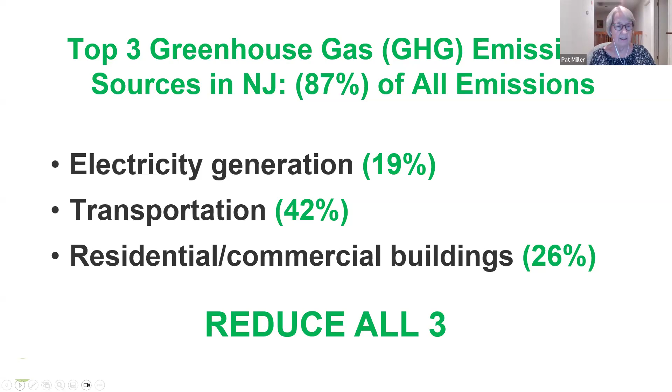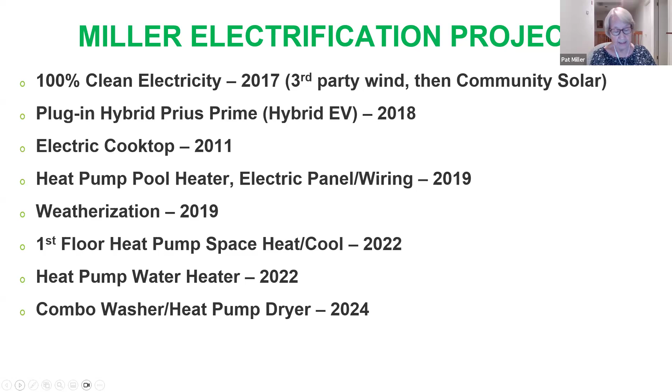We'll talk about the first 2, clean electricity and transportation, first. Then the other household electrification projects in the order they happened: first, early on, electric cooking, then a pool heater, then wiring and weatherization in 2019, heat pump and heat pump water heater in 2022, and finally the heat pump dryer in 2024. So I'll go through each one of these.

First, clean electricity. Rooftop solar is the best and most cost-effective choice for most people, but it's not practical for us in our totally forested yard. This is a Google Earth picture of our house. For years, we got our 100% clean electricity through a third-party supplier for wind power from Texas.

Now we have a better local choice in the new New Jersey Community Solar Program. Here, a developer builds a large commercial solar field and sells shares of the electricity to subscribers. Currently, there's a 20% discount below the utility cost, or more for low-income households. Our solar project is on a warehouse roof 5 miles from our home.

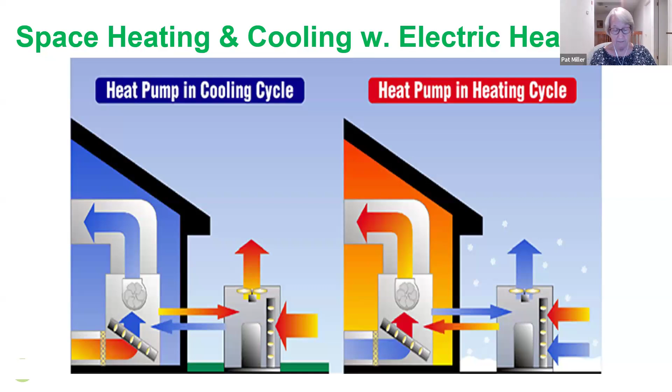We didn't really get serious about switching off gas until we were trained as climate reality leaders in 2017. Then we learned about heat pumps and how much more efficient and non-emitting electric appliances are than fossil-fueled ones. And of course, the heat pumps can be reversed and almost always are, to both heat and cool.

Ironically, though, the first heat pump we installed wasn't for our home airspace. It was an air-to-water pool heat pump. We'd had a gas pool heater for decades, and being outside in the weather, it had failed and been repaired several times. This time, when Steve said he would repair it, I told him it must be very inefficient.

It's so old, let's replace it with an electric one. This was 2019. He went shopping in local pool supply stores and found that it wasn't something that was stocked locally. So he shopped wholesalers on the internet. The one he found, a Hayward, was in Florida.

Of course, everyone in Florida has heat pumps, and many have pools. If the air temperature there is year-round 80 degrees, which it pretty much is, it takes practically no electricity. Steve said practically, because it does take electricity, but practically very little to heat or cool to a comfortable temperature with a heat pump from 80 degrees. They shipped the heater directly to us, and Steve installed it.

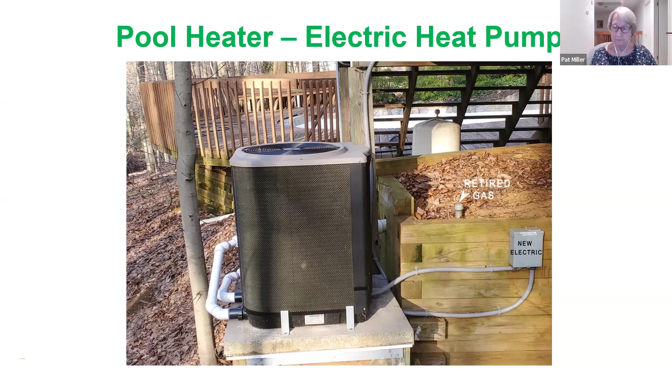Of course, the air in New Jersey is a lot cooler than Florida, but we only use the pool for about 2.5 months in the summer. And this thing is so much more efficient than burning gas. Plus, extracting heat from New Jersey's 70-degree air to heat water to maybe 85 degrees is so much easier a lift than, say, heating the air inside a home to room temperature from cold winter temperatures outside.

The difference between the outside temperature and the output, or inside temperature, is a big determinant of how efficient it's going to be and how much it's going to cost, how much electricity it's going to use. The pool heat pump is very economical.

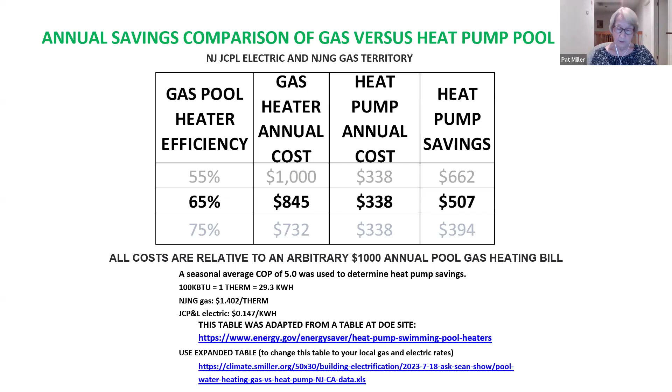Since the pool heater is about 10 feet from the house, this was the occasion for us to have the electrical work done to plan for future electric appliances. The IRA would cover some of this electrical work now, but of course we didn't have the IRA in 2019. So we paid about $3,000 for the pool heater and hired an electrician for another $3,000 to expand our circuit box and run wiring to the pool heater.

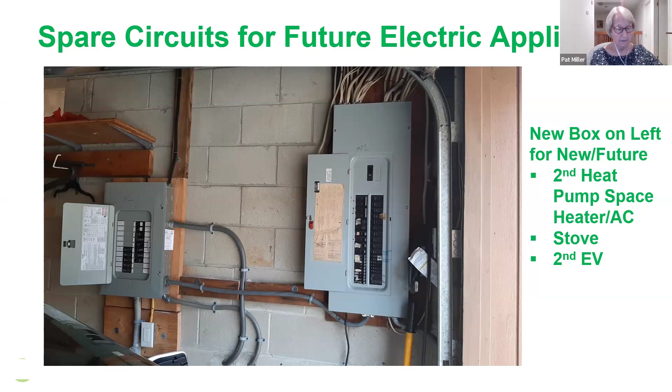Around the same time, Sustainable Jersey and the utilities started advertising and running promotions for home energy audits and energy efficiency measures like insulation, sealing air leaks, switching to LED lighting, and smart thermostats. We were planning on getting a heat pump space heater whenever we needed a replacement, but not until then. It made sense to weatherize first and have that done. Then a new electric heat pump system could be properly sized to our more efficient home when we needed it. Plus, we could start right away to save money by using less energy.

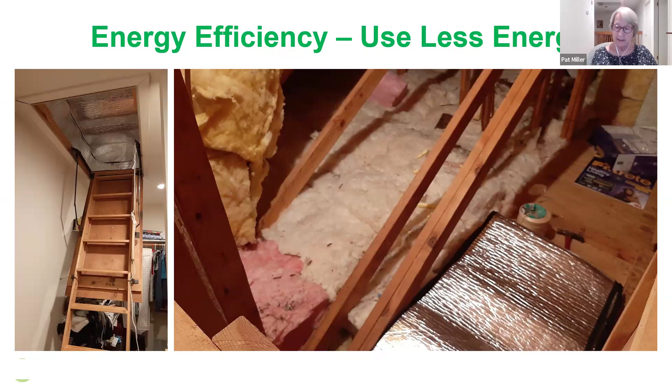Steve, ever the do-it-yourselfer, took the free audit and the Nest thermostat, of course, and did the upgrades himself. Here is an insulated zippered cover for the attic stairs on the left and extra insulation in the attic on the right. And these are his supplies for air sealing ducts around windows and doors and anywhere else there are air gaps to the outside.

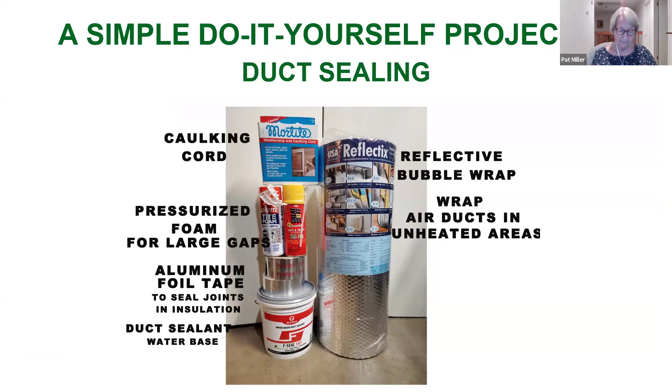We had a plan to start immediately to switch household appliances to electric whenever they needed to be replaced. And we knew it would take several years, which is fine. If you stage it over the next 8 years while the IRA is in effect, the tax credit caps reset every year.

Plus, this January 1st, 2025, the utilities Triennium 2 will go into effect, and we expect there to be much more generous rebates from the state and the utilities and discounts for decarbonization. We don't know what these are yet because they haven't all been approved, but we should be hearing the actual amounts by mid-October. And they go into effect on January 1st, as I said.

The most important and carbon-intensive appliance to replace is the gas or oil furnace.

When our air conditioner needs to be replaced, we plan to switch to an electric heat pump for both heating and cooling. In mid-2021, one of our 2 air conditioners stopped working, and we decided this was the opportunity to install a heat pump to replace it.

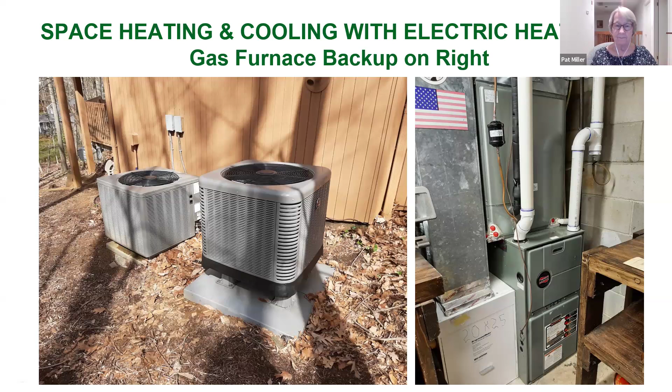The next year in 2022, toward the end of the year, our water heater sprang a leak and we replaced it with a Rheem electric heat pump water heater. It was purchased and delivered from Home Depot, and Steve installed that, both the wiring and the plumbing. This one uses...

240 volt service, but you can buy heat pump water heaters that plug into 120 volt outlets. This one cost about $2,000 for a 65-gallon tank. We have plenty of hot water stored, even if the electricity goes out.

We applied for and got a rebate of $750 from the state, and this was still before the IRA went into effect. Our gas bill during the spring and summer months is now less than $15 per month, which is just barely above the fixed access charge for the gas, which is $11.

The last 3 months, as a matter of fact, our gas bills have been $11 for each of the 3 months, which means we haven't used any gas at all.

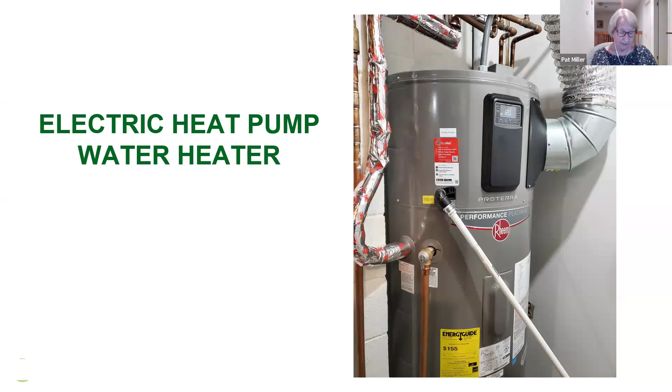Finally, this spring, 2024, our washer went on the blink and sprang a leak. I had decided that when either the washer or dryer failed, we would replace both with an all-electric set, and the dryer would be a heat pump. Shopping online, I was attracted to the combo washer heat pump dryer because it used a single 120 volt outlet and would not need any wiring work.

Both the washer and condensing dryer drain into the same drain as the old washer, and venting to the outside is not needed at all. We just closed up the hole in the wall. It reheats, the heat pump dryer reheats the air inside it continually while drying and condenses the humidity out of the air and down the drain.

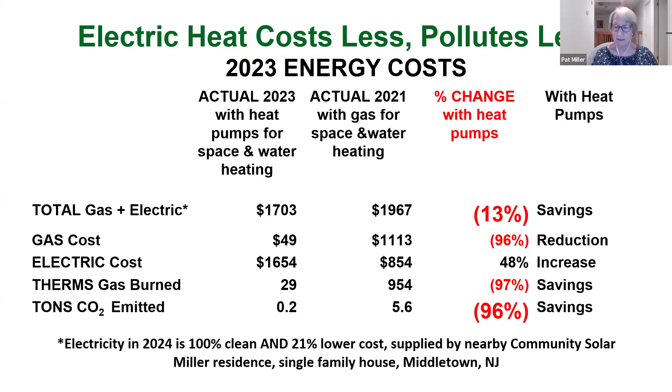I just wanted to point out how well our single non-cold-climate heat pump performs. On January 17th of this year, during a cold wave, the outside temperature dropped to 15 degrees overnight. The inside temperature was set to 68 degrees but had fallen to 65 when we woke up. We subsequently turned off the heat pump and turned on the gas furnace to warm up the house for a few hours until the outdoor temperature rose above 20 degrees.

January was the only month in the last year that our gas bill exceeded $15, which is just above the $11 access charge. The gas that month in January was $50 total, so that's the largest bill we had on gas.

Now, moving on to our daughter's house. Some of you have heard us talk about this house also. We've been upgrading and electrifying it, so I'll bring you up to date on that project.

A couple of years ago, they had a 2-room addition built onto their house that they specified with the contractor should be energy efficient. The contractor asked them if they would prefer a heat pump or a gas furnace. They had no idea, so when I overheard this conversation, I said, heat pump, of course.

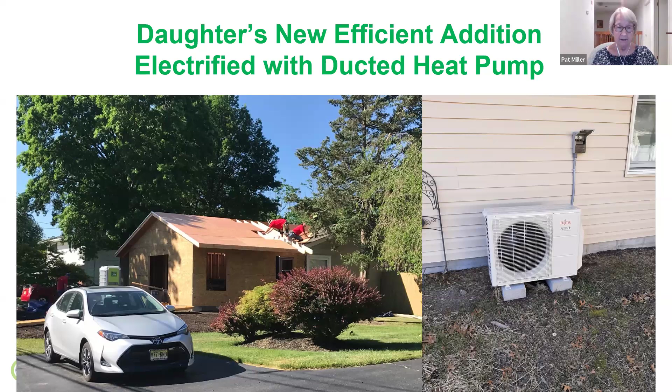They, and we, were now disappointed that the rest of the house was so drafty. They needed portable electric heaters in places for comfort, so we embarked on a big weatherization project.

This is the project we finally agreed to with the contractor Ciel Power, CIEL. The cornerstone of the project was the Home Performance with Energy Star program that the state runs with the U.S. Department of Energy, which provided a discount of $5,000 if a 25% energy reduction could be attained. In the end, it was much better than 25%. So the whole project, including insulation, air sealing, and an electric heat pump water heater, cost just over $9,000, which we thought was reasonable. And then, because now finally the IRA is in effect, it was eligible for a $1,200 IRA tax credit in 2023.

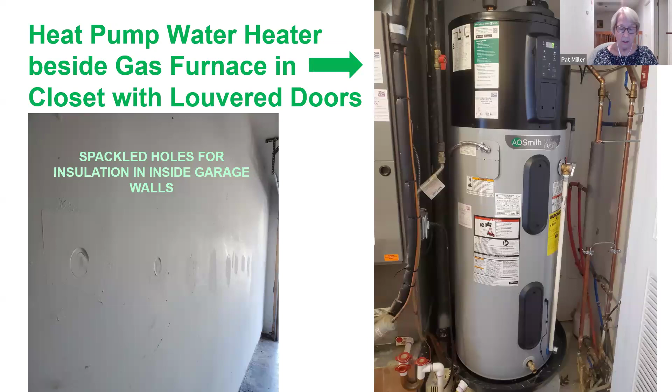Here's a picture of the wall insulation that they added. This is inside the garage. Mainly, the wall insulation was blown in from outside by popping a row of siding off. Inside the garage, they drilled holes in the drywall, blew it in, then spackled afterwards. I think they finished it up a little better than this picture I took shows.

On the right is the A.O. Smith water heater, which failed twice before they got a working model on the third try. It was either infant mortality or damage in shipping, but it caused us a headache. It's in a closet in the front hall next to the gas furnace, which you can barely see on the left of it. That gas furnace still heats the main branch of the house, and you see on the right the louvered doors.

The house sits on a slab, so there is no basement, and the louvered doors provide for the air circulation that the heat pump water heater needs. So, like a refrigerator, it's heating the water on the inside, and the outside air is cool, which is great in the summer but not so great in the winter.

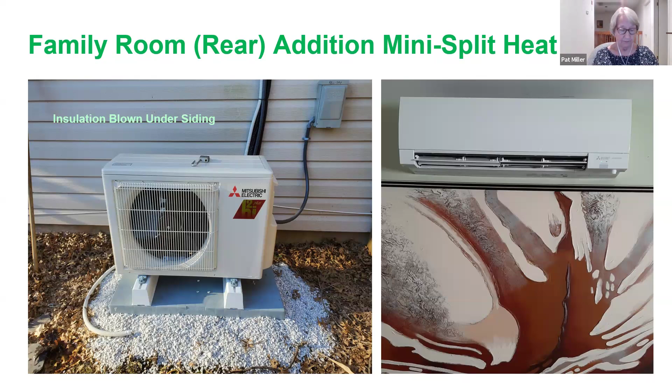Finally, in the last week of the year, our daughter was involved in a car accident that didn't injure anyone, thank goodness, but it totaled her car because the airbags deployed. They were able to buy this new Tesla within the period that it was eligible for the $7,500 IRA tax credit. I think it might still be, but at the time they were selling all these Teslas at the end of the year because the tax credit was supposed to go away.

It was supposed to go away for cars that were not fully manufactured in the US. Their $7,500 tax credit came as a discount at the point of sale, so they got it right away.

So they ended up in 2023 with tax credits of this $7,500 plus $1,200 for the weatherization plus $2,000 for the heat pump, totaling $10,700. We were a little disappointed there was not another heat pump credit for the hot water heater, but apparently they allow only one $2,000 heat pump credit. So they didn't get anything more for the heat pump hot water heater.

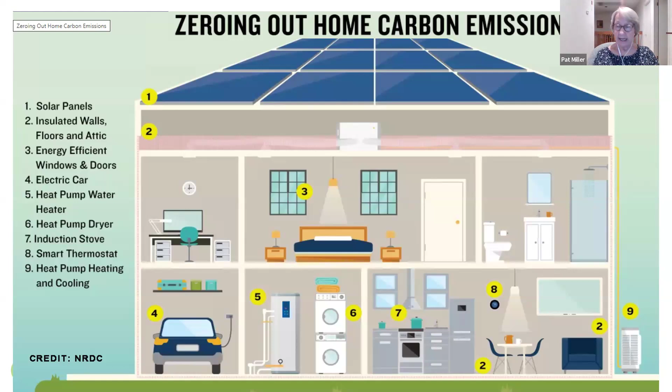Now, for creating your plan. Steve and I recently took Rewiring America's electrification coach training, and we're in the process of organizing this network of coaches in New Jersey. We currently have 8 New Jersey coaches and are offering the service to people who would like advice on how to go about electrifying their home. We'll be talking about it more in the coming months, but I'd like to show you a couple of the tools that Rewiring America offers online.

First, there is the IRA incentive calculator. There's a link to it that Steve put in the chat, I believe. They asked for some basic information the IRS needs to determine your eligibility. I entered our own home, except that the income listed there, $105,000, is not our income. It is the area median income for 2 people for our part of New Jersey, for our county. And you can look up the area median income, or AMI, for your county and household size at the link that's shown there.

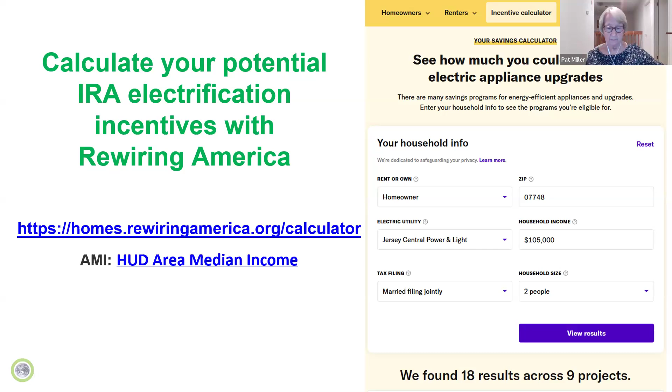For this moderate income household, the results include 9 different project categories where you can get IRA incentives, and some of these categories have multiple projects. If you click on any category, you'll get a page or more describing what may be included and what the amounts are. It goes alphabetically from battery storage, clothes dryer, cooking, all the way down to lawn care.

There's no way in this tool that I could show the results in 1 or 2 screenshots, and I don't think you want to go through 18 screenshots. So I created this chart, a list of the possible tax credits, only the tax credits, not the rebates. The Rewiring America results listed both tax credits and rebates included in the bill, but the tax credits are well known and have been available since 2023. In fact, in 2023, they gave out $8 billion in IRA tax credits for that one year.

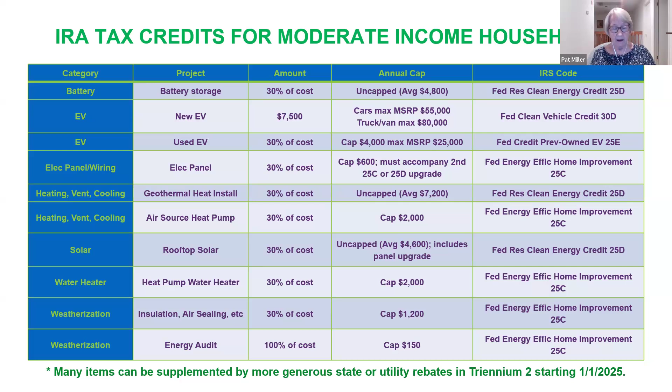Another tool that is especially useful for electrification coaching is the Home Electrification Planner. I did use this tool for our own home plan, although we clearly already have a plan. Most people would be starting to plan much earlier in the process than we are right now.

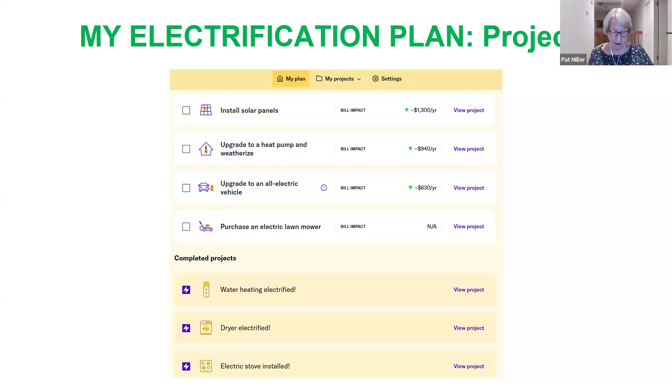Another thing is we said weatherization is always recommended along with the heat pump, to be as efficient as possible and to minimize energy use.

And the heat pump upfront costs. For us, they estimate $21,000 to $29,000 for the installed heat pump, plus about $25,000 to weatherize if we had not already weatherized. That heat pump cost might be slightly high since we probably need a smaller size than they're computing for just our second floor. We don't need another heat pump for the first floor.

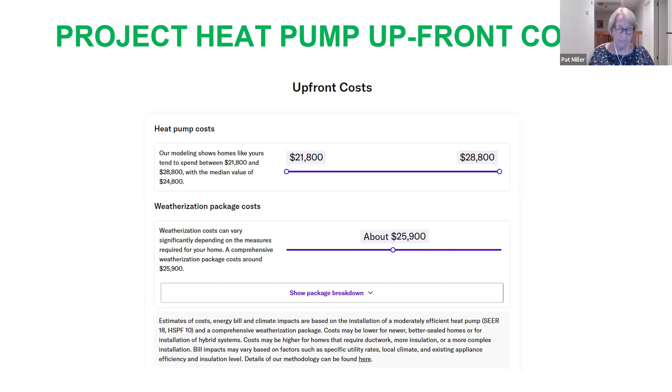Rewiring America is trying to get each state to provide lists of qualified contractors. At this point, the list of contractors is mainly created by the manufacturers who provide their own training on their own equipment, or by trade associations, which also provide training. But these don't tell the whole story, and they don't tell what we need, because they don't look at whether the contractors have expertise in heat pumps or whether they're enthusiastic about cold climate heat pumps. It really has to be cold climate heat pump expertise, which is the only thing we can use now if we want to get the IRA tax credits.

This list of contractors is something that our committee is working on. The BPU also has a list of contractors, but they don't have any indication about heat pumps either. So we're trying to get the State Board of Public Utilities to create a home electrification advice or coaching program for homeowners, administered by experts, and to maintain a list of certified cold climate heat pump contractors to recommend for each area of New Jersey.